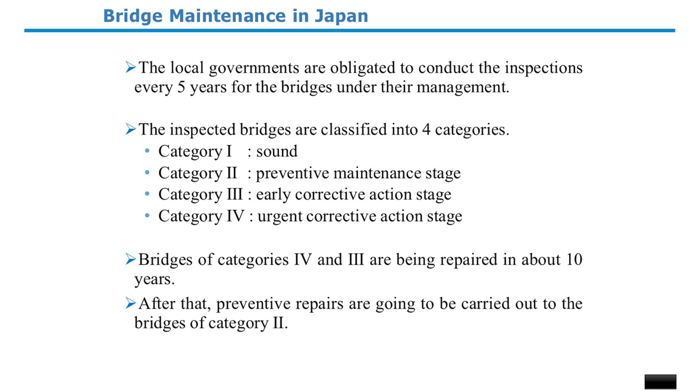As for bridge maintenance in Japan, the local governments are obligated to conduct the inspections every 5 years for the bridges under their management. The inspected bridges are classified into 4 categories. Category 1 means sound status. Category 2 is the preventive maintenance stage. Category 3 is the early corrective action stage. And category 4 is the urgent corrective action stage.

Now bridges of categories 4 and 3 are being repaired, which will take about 10 years. After that, preventive repairs are going to be carried out to the bridges of category 2. However, there is a problem in the preventive repair for category 2 bridges. Since there are no significant differences in the deterioration states among the category 2 bridges, it is not appropriate to determine the repair order only based on their deterioration states. We need to assess the performance of the deteriorated bridge elements.

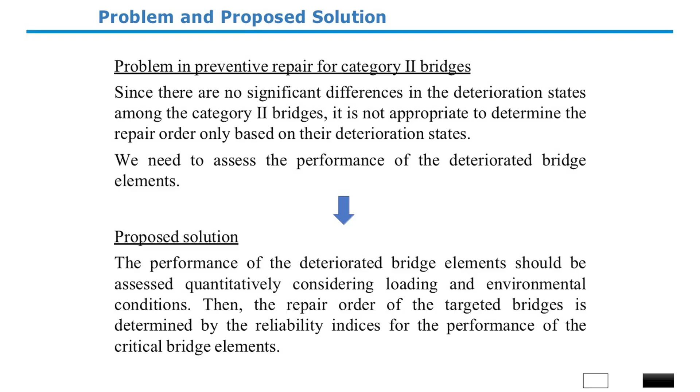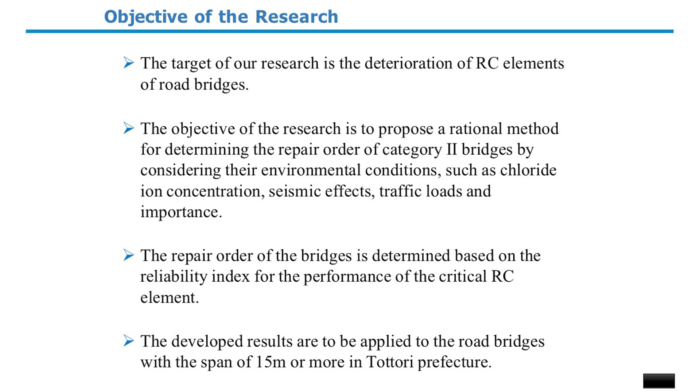In order to solve this problem, we propose the following. The performance of the deteriorated bridge elements should be assessed quantitatively, considering loading and environmental conditions. Then the repair order of the targeted bridge is determined by the reliability indices for the performance of the critical bridge elements. The target of our research is the deterioration of RC elements of road bridges.

The objective of the research is to propose a rational method for determining the repair order of category 2 bridges by considering the environmental conditions such as the chloride ion concentration, seismic effects, traffic loads, and importance. The repair order of the bridges is determined based on the reliability index for the performance of the critical RC element. The developed results are to be applied to the road bridges with a span of 15 meters or more in Tottori Prefecture.

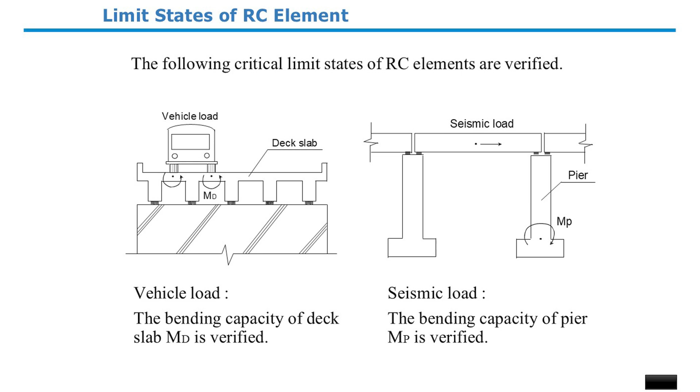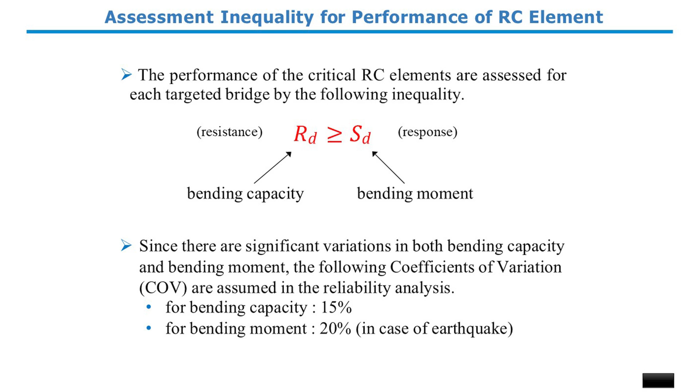2 limit states of RC elements shown in the figures are verified. One is the bending capacity of the deck slab subjected to vehicle load. The other is the bending capacity at the bottom of the pier subjected to the bending moment caused by seismic load. The performance of the critical RC elements is assessed for each targeted bridge by this inequality. R sub D is the bending capacity and S sub D is the bending moment in this case. Since there are significant variations in both bending capacity and bending moment, coefficients of variation of 15% and 20% are assumed respectively.

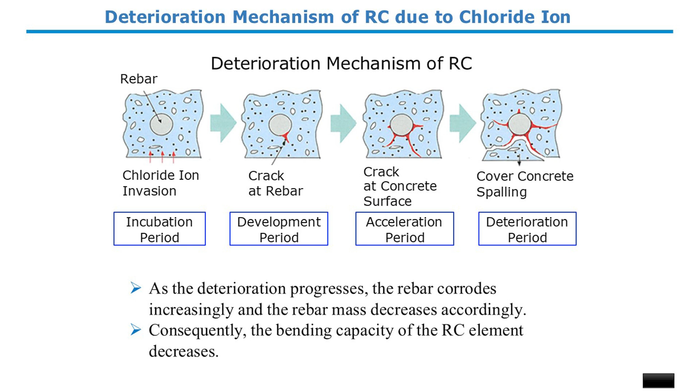These figures show the deterioration mechanism of reinforced concrete due to chloride ion. At the incubation period, the chloride ion invades into the concrete and corrodes the rebar. Then the corroded rebar expands and pushes the surrounding concrete, which causes the crack at the rebar. This is the development period. At the acceleration period, the crack propagates to the surface of the concrete. And at the deterioration period, the cover concrete spalls.

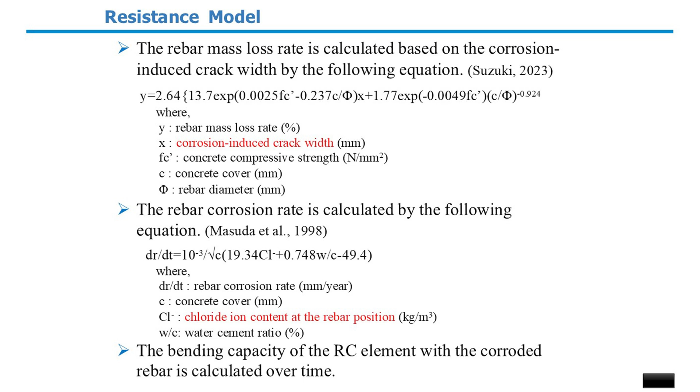As the deterioration progresses, the rebar corrodes increasingly, and the rebar mass decreases accordingly. Consequently, the bending capacity of the RC element decreases. The rebar mass loss rate is calculated based on the corrosion-induced crack width with this equation. And the rebar corrosion rate is calculated based on the chloride ion content at the rebar position by this equation. The chloride ion content increases as time goes by. These equations are to be replaced by the result of SIP's research. The bending capacity of the RC element with the corroded rebar is calculated over time.

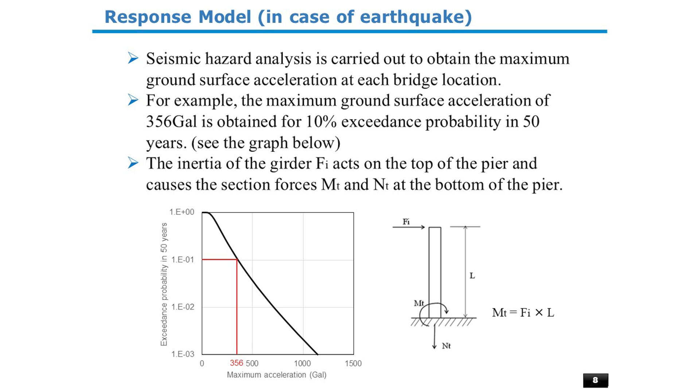In the case of earthquake, the seismic hazard analysis is carried out to obtain the maximum ground surface acceleration at each bridge location. For example, the maximum ground surface acceleration of 356 gal is obtained for the 10% exceedance probability in 50 years. When the earthquake occurs, the inertia of the girder acts on the top of the pier and causes the section forces at the bottom of the pier.

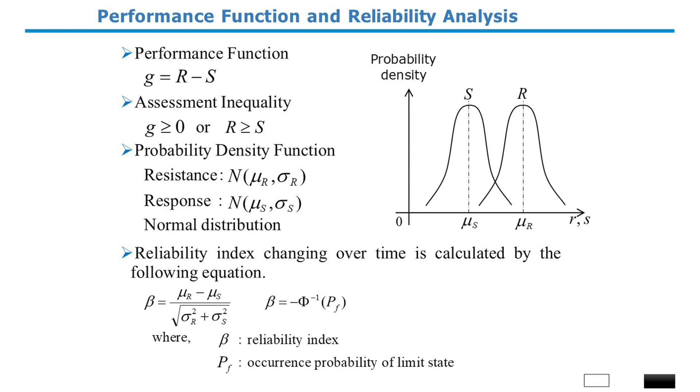The performance function and the assessment inequality are shown like this. R is the resistance of the RC element, and S is the response caused by loading. In case of normal distribution, the probability distribution of R and S can be described like this.

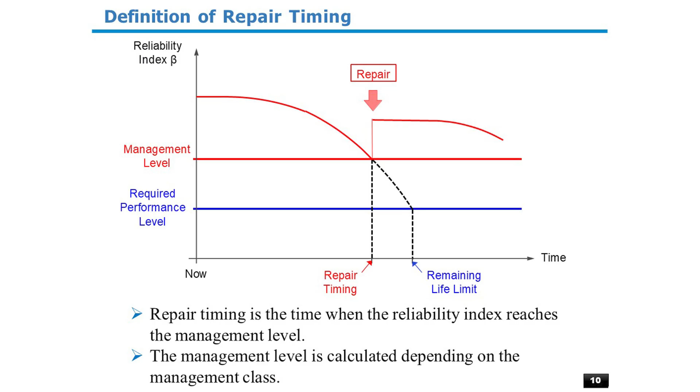Then the reliability index is simply calculated by this equation. Reliability index beta corresponds to the occurrence probability PF of the limit state. This figure shows the reliability index change over time. The vertical axis is the reliability index beta, the horizontal axis is time.

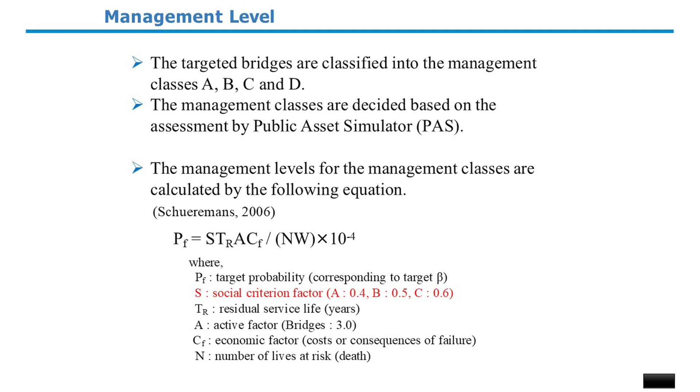It is defined that the repair timing is a time when the reliability index reaches the management level. The management level is calculated depending on the management class. The targeted bridges are classified into the management classes A, B, C, and D, as Dr. Wakahara mentioned. The management classes are decided based on the assessment by public asset simulator.

PAS is a system based on geospatial database that integrates various administrative data such as population, housing, traffic, facilities, and disaster information into a road network model. Class D bridges require consideration for potential decommissioning due to reasons such as low traffic volume or the availability of alternative routes. So the Class D bridges are treated differently from Class A, B, C bridges. Our proposed method here is applied to Class A, B, C bridges.

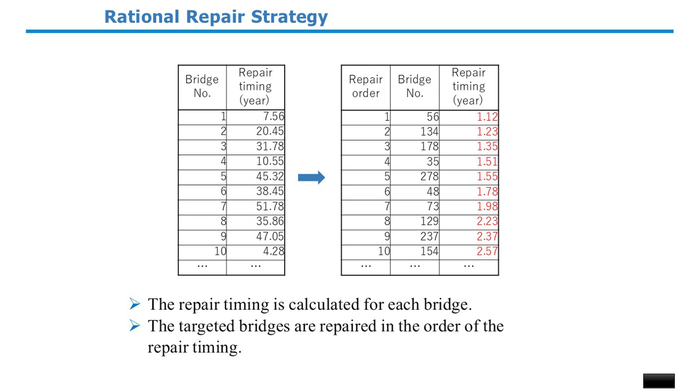Then the management levels are calculated by this equation. The management classes are distinguished by the social criterion factor S. The repair timing is calculated for each bridge. Then the targeted bridges are sorted in the order of the repair timing, as shown in this table. And the targeted bridges are repaired in the order of this table. This is the rational repair strategy we propose.

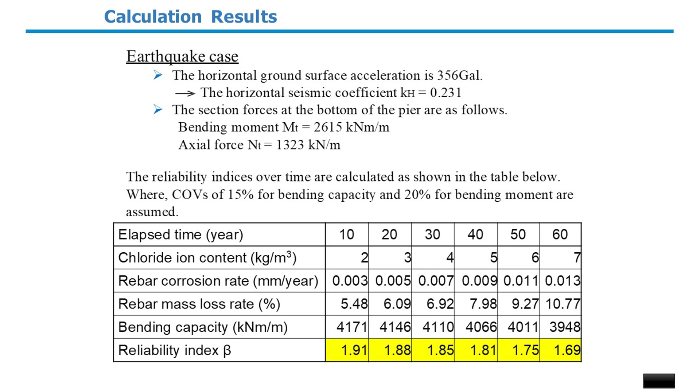This example is an earthquake case. By the seismic hazard analysis, the horizontal ground surface acceleration of 356 gal is obtained. I converted this acceleration to the horizontal seismic coefficient of 0.231. By the structural analysis, the bending moment and the axial force at the bottom of the pier are obtained, like this. You can see in this table, chloride ion content, rebar corrosion rate, rebar mass loss rate increase as time goes by. On the contrary, the bending capacity decreases accordingly.

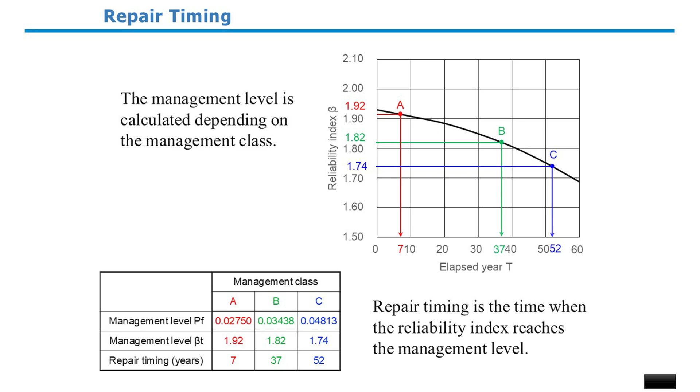Then the reliability indices are calculated as shown in this table. The calculated reliability indices are plotted in this figure. The vertical axis is the reliability index and the horizontal axis is the elapsed year. The management level is calculated depending on the management class. For the management class A, the management level is 1.92. For class B, the management level is 1.82, and for class C, the management level is 1.74. Then the repair timings are obtained as 7 years for class A, 37 years for class B, and 52 years for class C, respectively.

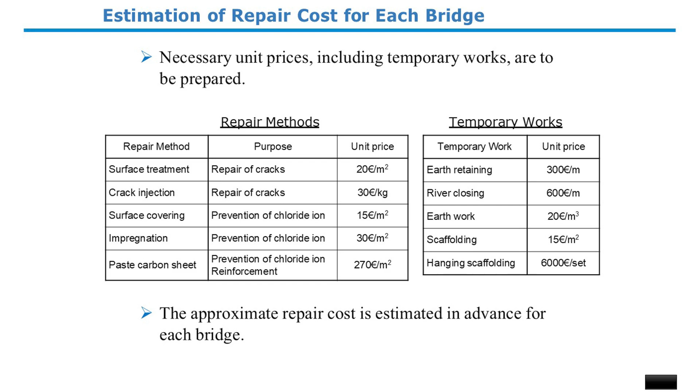In order to estimate the repair cost, necessary unit prices for repair method and temporary works should be prepared. This table shows an example of unit prices. Then the approximate repair cost can be estimated in advance for each bridge. The targeted bridges are sorted in the order of the repair timing. This is the repair timing. The bridges whose estimated cost fit the annual budget are to be repaired in the order of the repair timing.

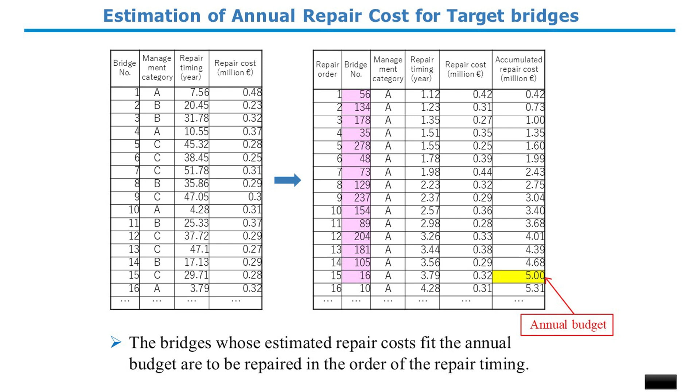This table shows the case that the annual budget is 5 million euro; up to the bridge whose accumulated repair costs reach the annual budget are to be repaired. This is one of the rational repair strategies for Category 2 bridges and helpful for the bridge maintenance of the local governments. I'd like to conclude my presentation.

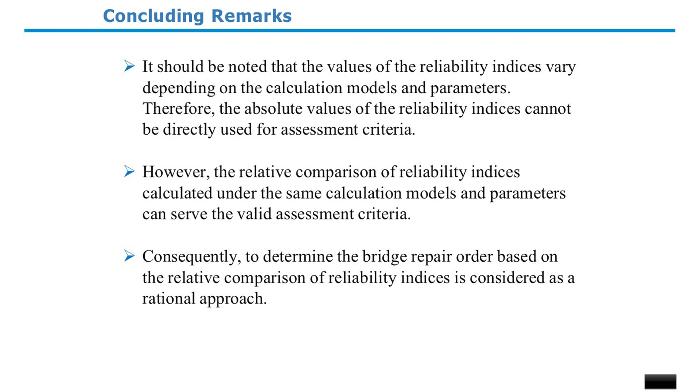First of all, it should be noted that the values of the reliability indices vary depending on the calculation models and the parameters. Therefore, the absolute values of the reliability indices cannot be directly used for assessment criteria. However, the relative comparison of reliability indices calculated under the same calculation models and parameters can serve as valid assessment criteria. Consequently, to determine the bridge repair order based on the relative comparison of reliability indices is considered as a rational approach. In the future, the following items are going to be updated through SIP's research works.

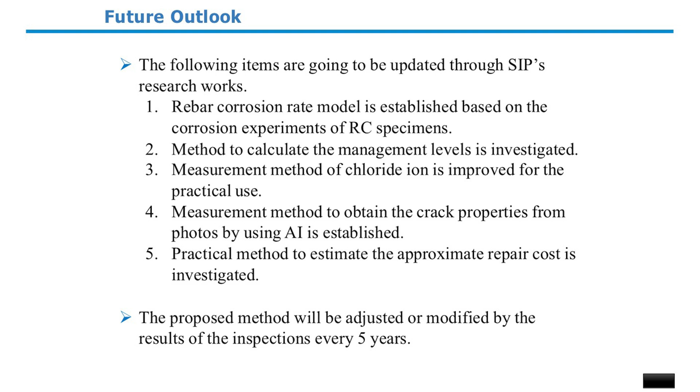Rebar corrosion rate model is established based on the corrosion experiments of RC specimens. Method to calculate the management level is investigated. Measurement method of chloride ion is improved for the practical use. Measurement method to obtain the crack properties from photos by using AI is established. Practical method to estimate the approximate repair cost is investigated. The proposed method will be adjusted or modified by the result of the inspections every 5 years.